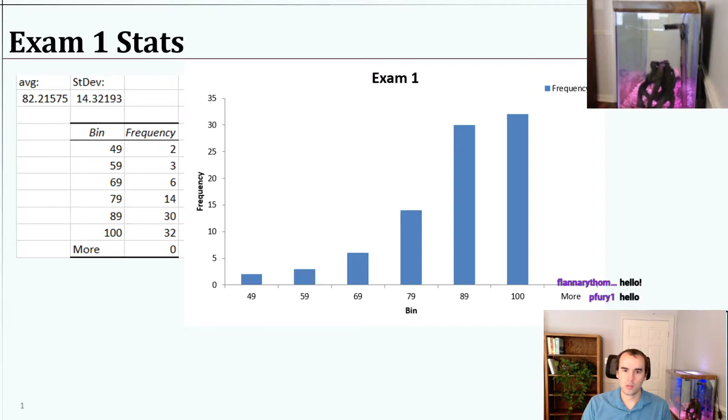So I wanted to make a note there first, and thanks for showing up to all of you who are already here. So the exam in general, a lot of people did well. You can see the distribution is kind of highly favoring the higher grades. That's a good thing. Typically I'd probably expect something a little closer to a bell curve, like that. But this is certainly acceptable as well.

I'd like for you to be mastering the topics and capable of doing well on the exam. So there's one thing I wanted to mention.

There were a few cases of people who decided that with the first problem, the BOD problem, it was going to be a good idea for some reason to use the book. And it was very apparent to me that you used the book, those of you who did, because you were using equations that we have not covered yet, and we won't cover for another few weeks. So either you studied well in advance, or you decided to use the book or some other resource online, which essentially you signed in paper that, through Moodle, that you weren't going to cheat in any way.

So maybe I should have been more clear that no, I do not want you to use the book. But for those of you who did do that, I simply had no sympathy. So if your answer involved one of those BOD specific equations, then you got no partial credit for your wrong answers there. It wasn't a big deal.

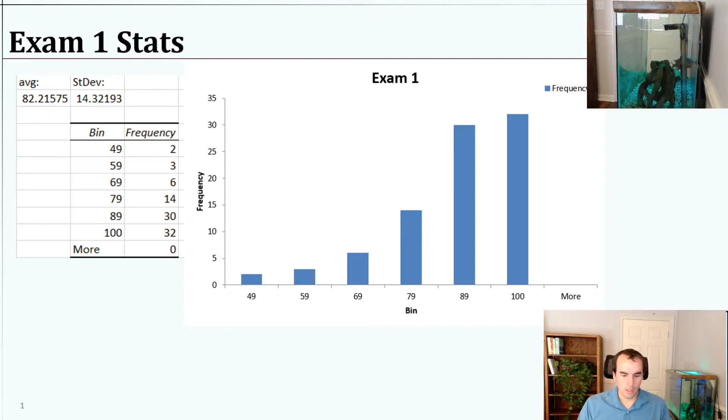There's no reason to go look into it. I actually spend a lot of time working on creating new problems so that it's fair for everybody if somebody did try to cheat. And so if you're going to do that, it's really not helpful, you know? So I'd encourage you to rethink the way you're approaching that.

So anyway, I'm not going to bother with any academic discipline sort of thing. I just don't think that was a very professional or upright thing to do. And so the grades, for that particular problem, reflect that.

Okay, anyway, overall I was pretty happy. I think a lot of you will be happy. Two of you had a perfect score. I didn't, even before I touched up any of the grading, I didn't have to touch those grades at all, so that was excellent. Congratulations to the two of you who got a perfect 100.

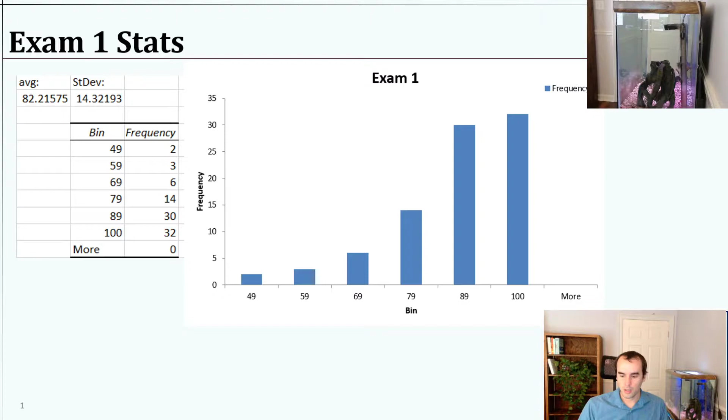All right, so with that, unless there are any questions, those should be posted now to Moodle. I did that just before we began here, so you should be able to see those any minute now if you check. And if you've got any questions in that regard, I'm happy to answer them, although I might save them for after, at the end of lecture, unless you've got something right now that's pressing on your mind.

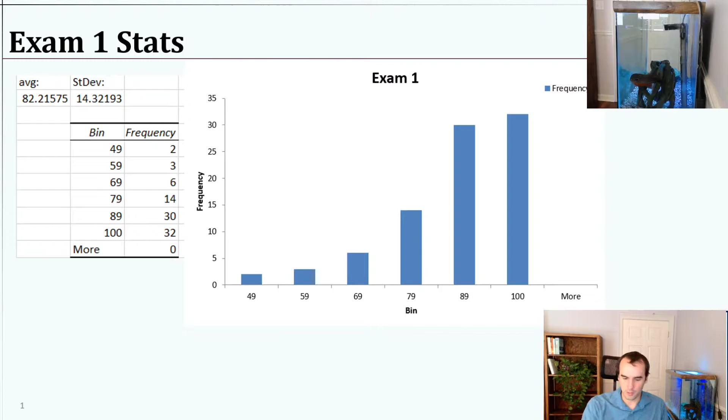Okay, so otherwise we're coming back to membrane filtration, and I was busy scurrying around trying to get ready just now. I might go and find my Lifesaver water bottle to show you the water bottle that encases a membrane filter.

We're going to have some time to solve a few problems at the end of this lecture, so I might go ahead and try to find that while you're working on a problem here in a little while. Okay, so what I want to do today is really get into the details of how to mathematically describe membranes and membrane processes. We've been talking about membranes as some sort of permeable membrane, permeable flat sheet.

We could imagine it kind of like a grid or a screen where there are pores that water can go through, but particles cannot. So you get particles or other objects stuck on the grid.

With that in mind, think about a simple membrane schematic where water is coming into this chamber, some portion escapes through the membrane, and some of it is rejected by the membrane, along with presumably whatever contamination the membrane is removing.

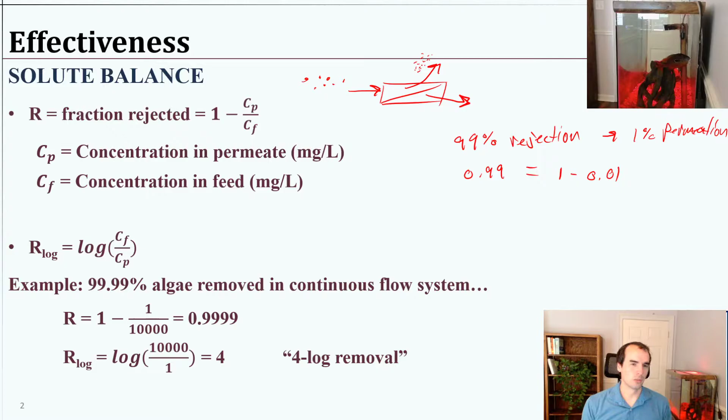That's all we're saying right here, but the reason we might describe it this way is because the concentration in the permeate and the concentration in the feed might be easier to measure or easier to know than the concentration in the retentate. So we look at the concentration in the feed and the concentration in the permeate in order to know something about the concentration in the retentate.

So the fraction rejected we can get if we know something about how dirty our water is, and we know something about how clean we need the water to get and how we've designed our operation. Then we can manipulate this, use those two parameters, and know something about this concentration.

And keep in mind, again, we do have a mass balance here. We're not creating or destroying any amount of matter here. So that's one useful tool we have.

We can also do the same type of thing but use log units and call that R log. In the case where we want to remove 99.99% of algae, think of our previous example from last time, except instead of using a batch case where we just squeezed most of it out, we can have a flow-through system where we have a feed, a continuous feed and a continuous retentate.

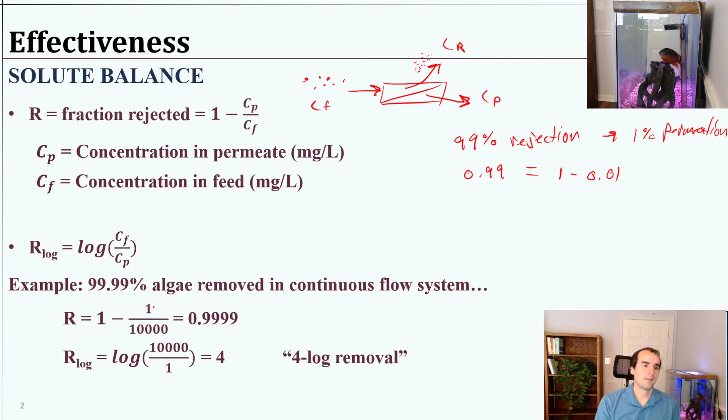And then we can say the R log in that case we're going to call that 4, using the same type of principle we described at the beginning of the semester in terms of using that log shortcut. So a 4 log removal, meaning that the fraction rejected is 0.9999, translates to 1 minus 1 over 10,000. That's 4 log units, 1, 2, 3, 4 zeros there, 4 log units in terms of base 10.

And so we can take the R log of that fraction, that would be the same thing as writing, if we take just R of 99.99% removal, if we take 1 minus that 1 over 10,000, we get 0.9999. If we take the R log, instead of arranging it this way, we can simply say the log of what's in the feed divided by what's in the permeate.

That's going to give us our R log solution here. So the log of 10,000, because our feed is 10,000 times more concentrated than our permeate, we have 10,000 more of these dots than we do on the other side. That's our 4 log removal, where our log is 4.

So it's basically the same way to describe it, and mathematically we just put it this way. It's probably intuitive, you're probably able to intuit this just based on what it means when we describe 4 log removal in general, but you'll have this equation on your equation sheet anyway.

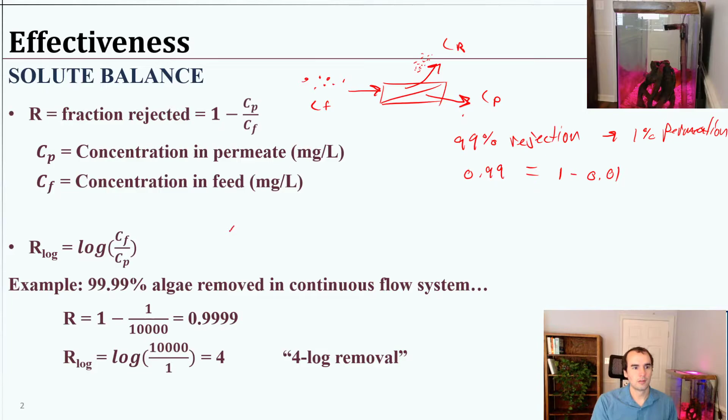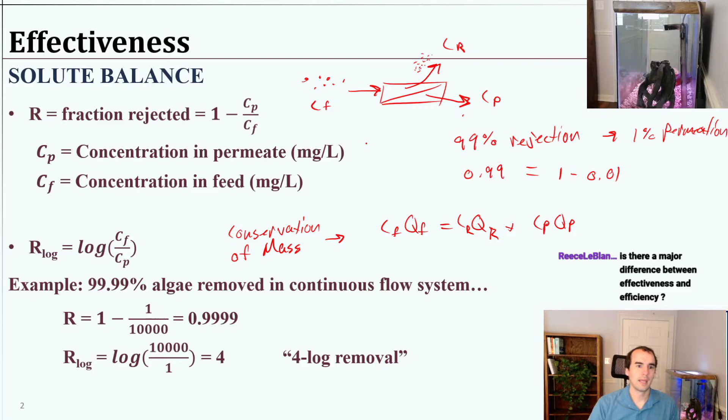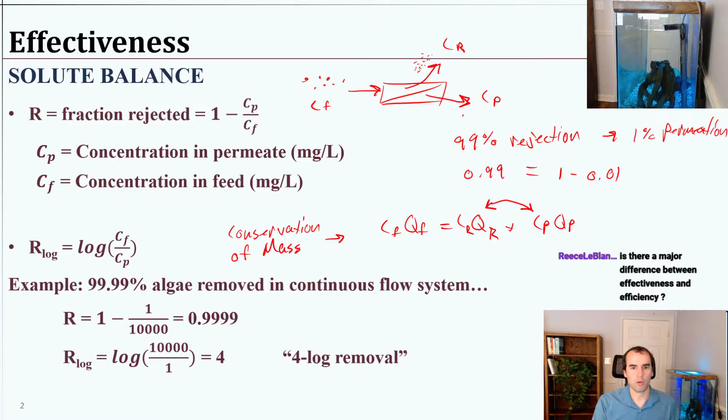Before I go on, I did mention we have this general conservation of mass. Based on the conservation of mass, we know that the concentration in the feed times the Q in the feed is going to be equal to the concentration in the retentate times the flow of the retentate, plus the concentration in the permeate times the flow of the permeate. Hopefully that's obvious, we've been doing that type of thing all semester long. This is just looking at a control volume here where that box is drawn, and even though we might be separating the mass, the membrane is effectively dictating how much is in here versus how much is in here. Essentially, it's still the same in terms of overall mass. So that's our conservation of mass.

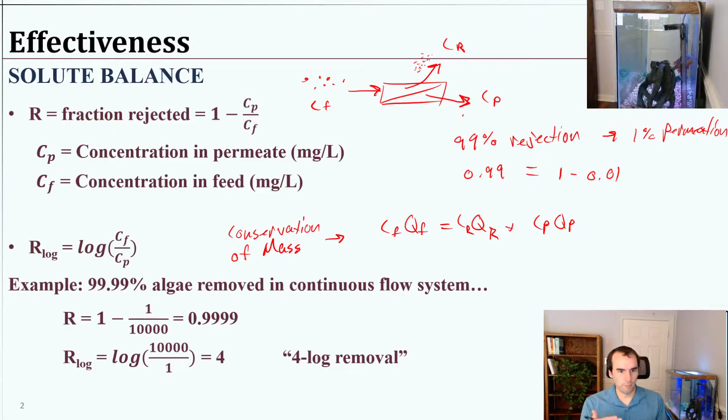Is there a major difference between effectiveness and efficiency? That depends a bit on how you define both of those terms, so it's a good question. You might be thinking of effectiveness in terms of how effective it is at removing a given particle, and that would be kind of what we're talking about here with the solute balance. It's effective at removing 99.99% of viruses or algae or whatever. So you can have a membrane that has X amount of effectiveness at removal.

But then you also are interested in considering the efficiency, which is a really good question because it leads us into the water balance, where we think about how efficient we are. We could look at it on a water balance: how much clean water compared to all the dirty water we produced, or the total flow of water we're feeding into the membrane. So there's an efficiency factor there, or you could think of it in terms of the energy we're spending. Generally there is some correlation between the two, where to get really high effectiveness at particle removal, you likely have to use a small pore size membrane, meaning you have to apply more pressure, so it'd be less energy efficient, or perhaps you have to do more back flushing, send more water to the retentate, and have lower efficiency on a water basis. So there's an important distinction I would make there.

In terms of water balance, the way we would typically describe a water recovery rate, this time I'm going to use lowercase r. I apologize for the different r's, I try to stick with what our book and the other resources available to us use. Our book doesn't do much with it, so if you're wanting to read more about this, I would point you to...

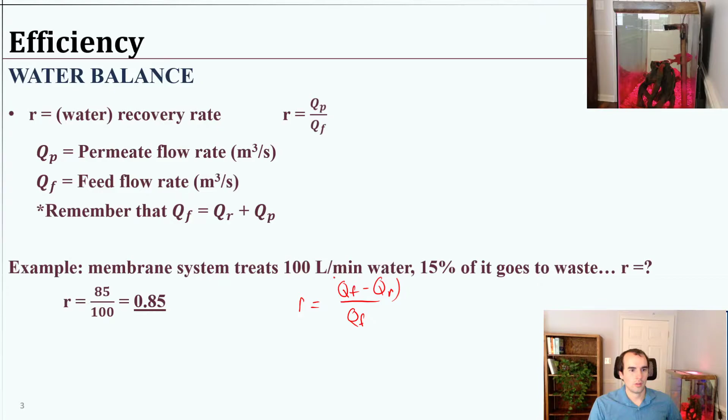In another example, we could say that if a system treats 100 liters per minute of water and 15% of it goes to waste, R equals 85%, because our recovery is equal to Q in the permeate divided by Q in the feed. We were given that 15% of it goes to waste, so really we could define this Q permeate as QF minus Q retentate.

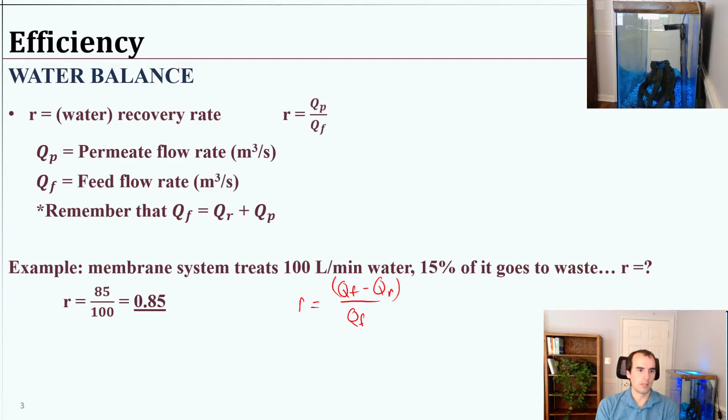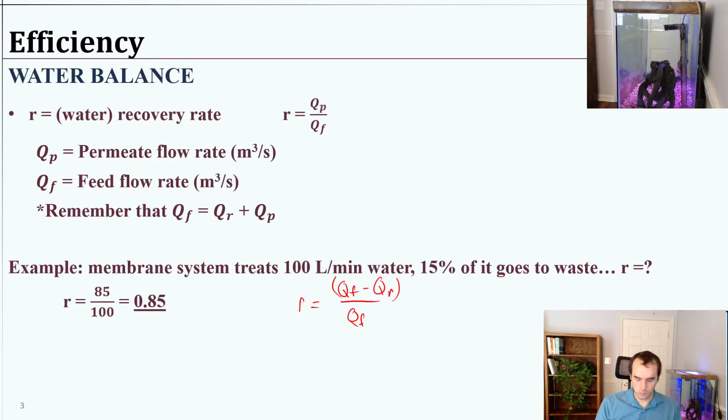Essentially what I did was manipulate our flow balance. Keep in mind, just like the conservation of mass, that also applies to our water - we're not creating or destroying any water in the system. We always have the total amount of flow in the feed equal to the total amount of flow combined in the retentate and the permeate. Hopefully this should be intuitive once you take a look at it, and this is again a relatively simple equation just to describe some basics here. These units don't have to be exactly meters and seconds, this could be liters per minute or whatever.

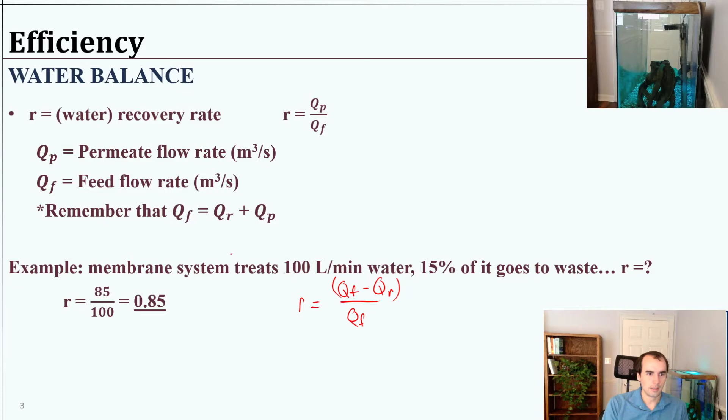Okay, so then another term we want to talk about is the production. How much water are we producing, and how do we know how many membranes we need to get there? So that would be where we describe flux. Often we use the symbol J for flux, and what we're talking about is flux across

a membrane. So just like our granular filters, we had some sort of filtration bed and water was being applied at some loading rate; for a membrane, the same thing applies. We have some flow rate of water normalized by area. So we still have Q divided by area. In this case, it's the area of a membrane. So that's written right here.

And by the way, this is going to be the flow in the permeate, because when we're talking about flux, we define it as flux across the membrane, not flux meeting the membrane. So there is an important distinction here where we might be applying a lot of flow to the membrane, but some of it is just going to the side. So really when we're talking about flux, we need to be talking about flux moving across it.

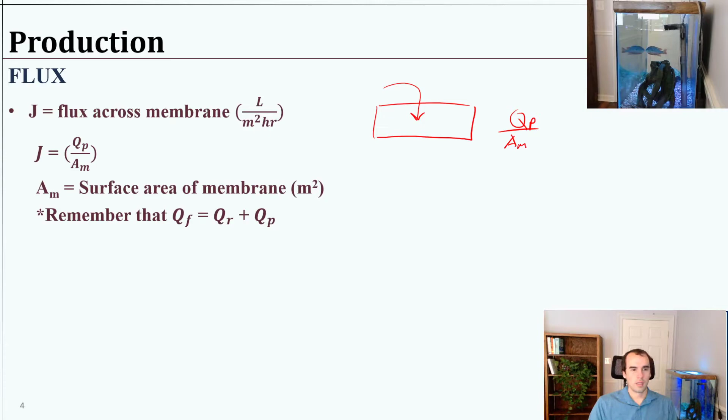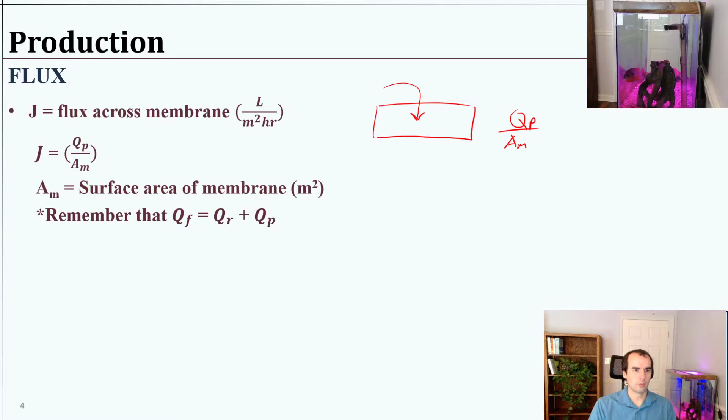Of course, area here will be the surface area. And if you remember our discussions, we could have a spiral wound membrane with multiple flat sheets in here, or a tubular membrane. So there's some geometry we can expect to deal with in terms of solving for membrane area.

But again, looking at it this way, it's relatively simple. And we'll take a look at a few more equations looking at how we might understand how much flux we get given some pressure that we applied.

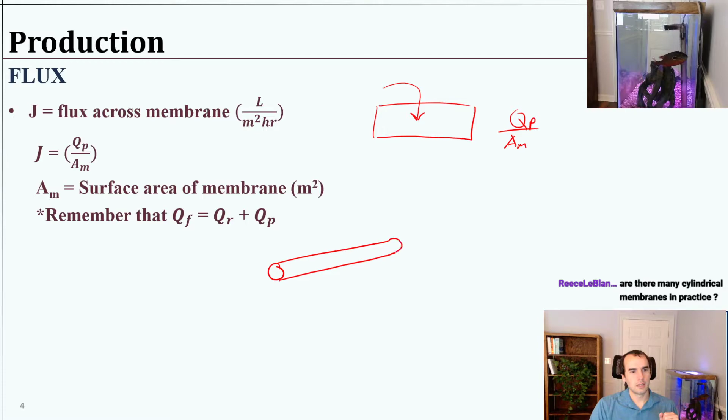Okay, yes, actually, there are many cylindrical membranes in practice. I did show a few. So by cylindrical, are you meaning like hollow tube, like this? These do exist. I think the flat sheet cylindrical ones are probably more common, or we have them like this, more common than just tubular.

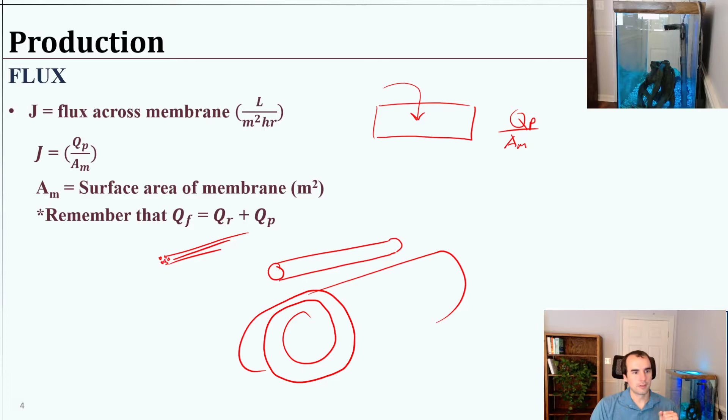But then nowadays there's lots and lots that are those hollow fiber ones like this, all bundled up in some container. So certainly they are applied in each way.

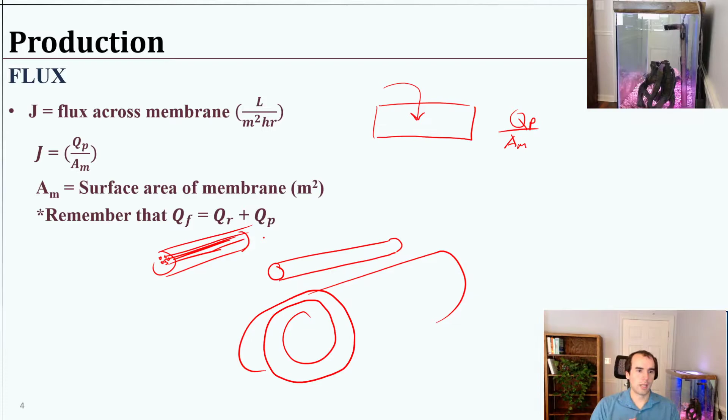My impression is that a simple tubular one is not particularly high surface area, so those would probably be used more often for microfiltration rather than ultra or nanofiltration, and perhaps for smaller cases or laboratory scale studies, things like that.

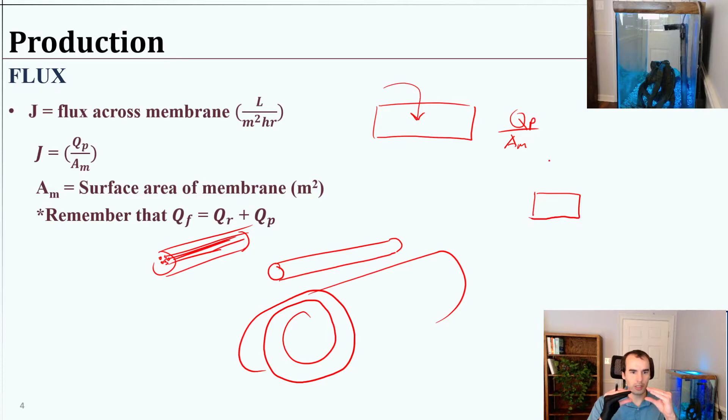In reality, a lot of laboratory scale studies are legitimately a flat sheet, just sandwiched in some sort of a chamber for easy control, easy access, all that. Okay, so here's an example.

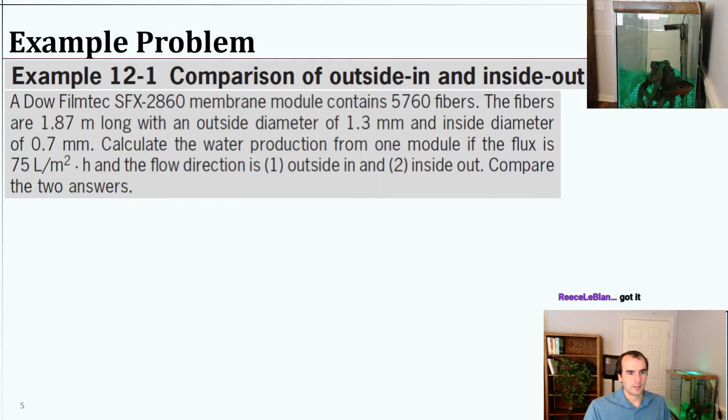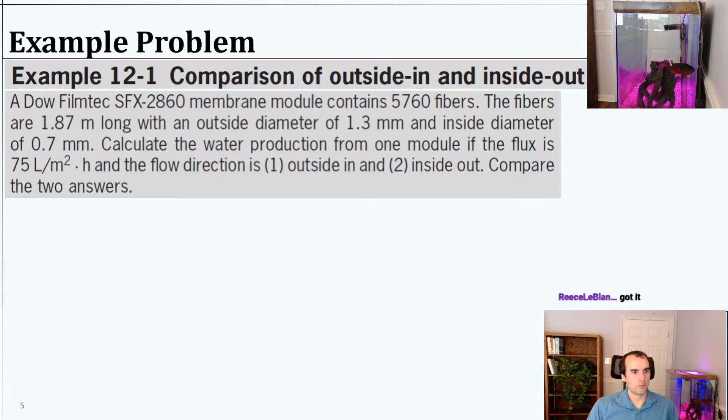Okay, so here's a problem. This is from chapter 12 of one of the textbooks, not ours. Ours doesn't give membranes quite enough time. So we're going to compare an outside in and an inside out flow regime. We have a Dow Filmtec SFX-2860 membrane module, and this membrane module contains 5,760 fibers.

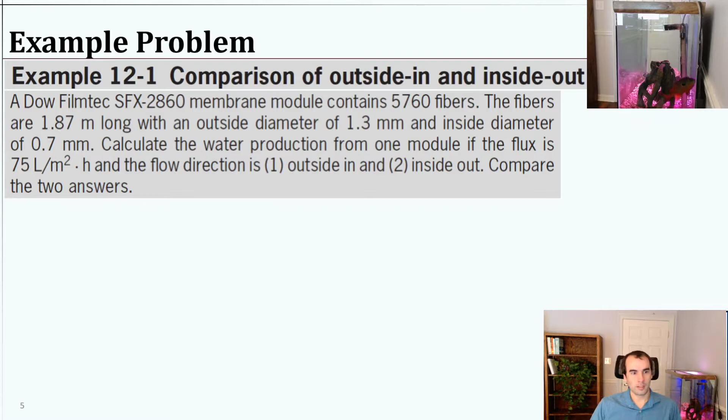Each of those fibers are 1.87 meters long with an outside diameter of 1.3 millimeters and an inside diameter of 0.7 millimeters. And so we're asked to calculate the water production from one module if the flux is 75 liters per square meter.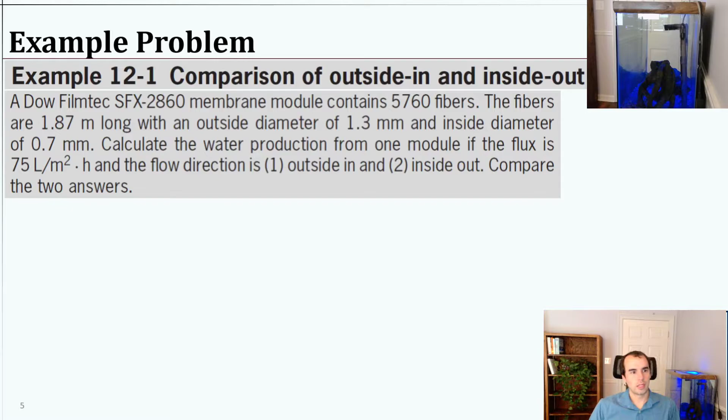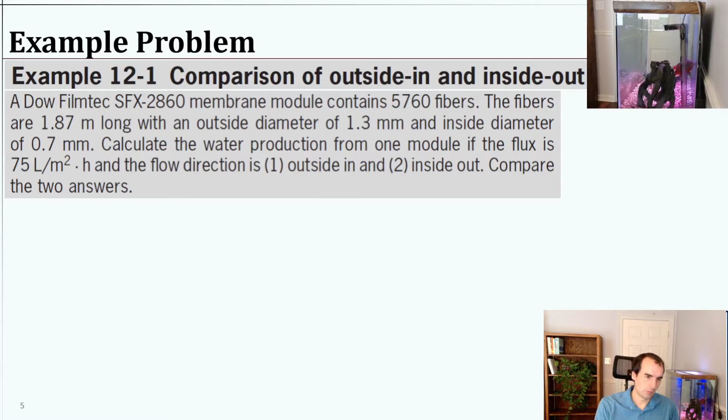And we're instructed to do this in the cases that the flow direction is outside in and inside out. Well, it's 1 and 2 here. And then it asks you to compare the two answers. So let me remind you what this is talking about.

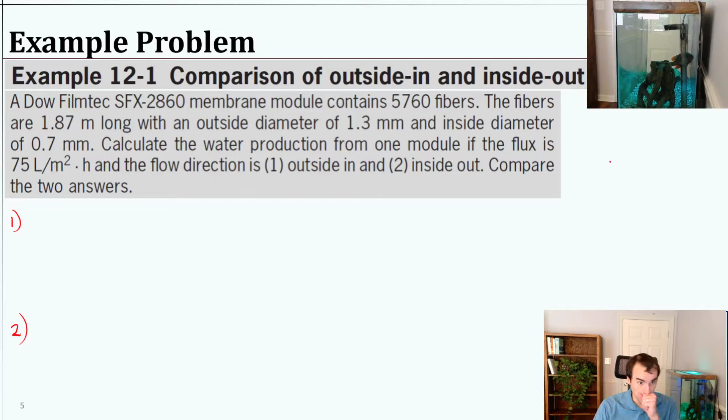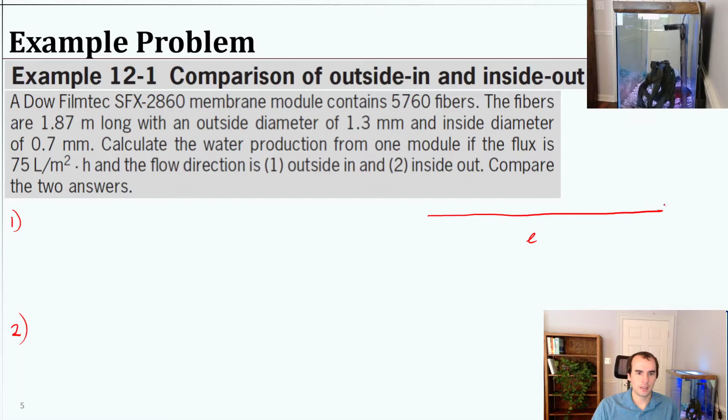So these are long fibers that have some length. And if you were to take a close-up look at just one fiber here and look at the edge, what you're going to end up seeing is a fiber that has essentially two diameters, right? So we have something like that, where the membrane material, the supporting layer, is all in there,

and whether we're operating inside out or outside in will dictate which surface of this cylinder is used as effectively the separation layer. So either we're mapping the geometry to find the surface area here in case 1, right?

Or we're going to do it along the inside for case 2. I'm just cutting it in half just to kind of delineate the two different versions, but it would go all the way around in either case. I just drew it in half just to demonstrate the difference there. Okay, so I'm going to give you a couple minutes to look at that.

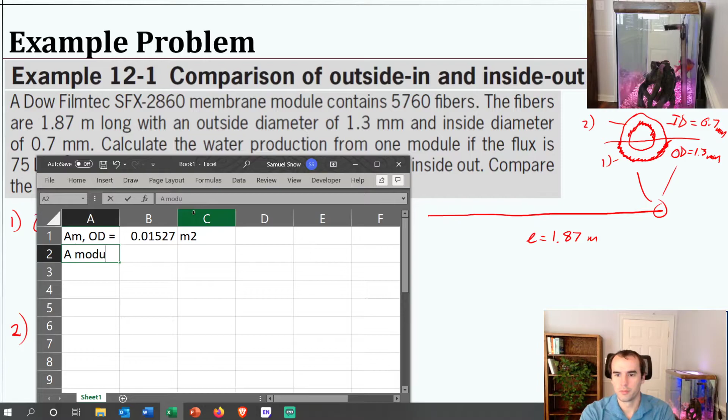Let's say area of the membrane OD. Okay, so that should be the area in square meters. Then we need to know the area for a module. And so we're going to take this number and multiply that by the number of fibers per module, which was 5,760. Also in square meters. Okay, so we've got that.

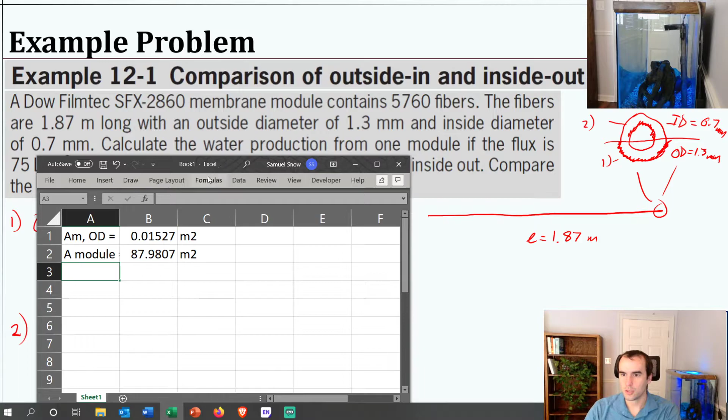Next, what we're going to want to do is take a look at, so this was, let's say, 0.0152, 152. So the area of a module is 87, but really effectively 88 meters squared.

Okay, so somebody got a different area for the membrane. For one fiber, did you do 2 pi r as your circumference? That's correct, right? I'm not having a brain fart. What did you do differently? I'm going to go ahead and continue working on the problem, but let me know if you see something that's different.

So then we want our flow rate. Our flux is flow rate over the area. So our flow rate then is going to be the flux times our area. And that's why we're solving for the area of the module. Okay, so you got 0.0076. So that was for one fiber, I'm assuming.

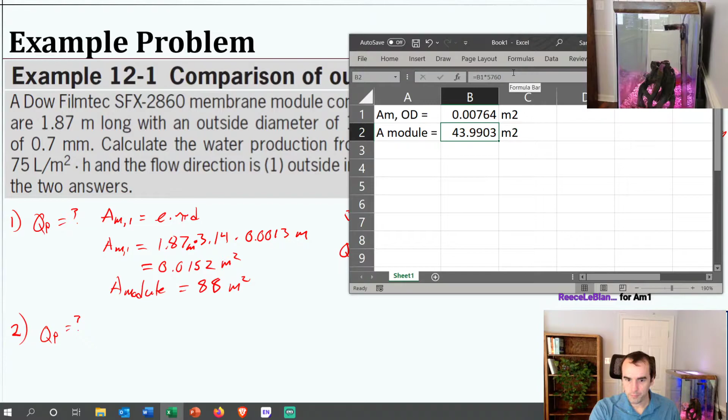So then we should update this here. So it should be half that, 44. Yeah, you could certainly find the QP for one fiber and then multiply. That multiplication doesn't have to happen on the front end. That could be either place. So this one was half that. Okay, yeah, so that's certainly fine either way.

But once we get this going, then we have 75 liters per square meter times essentially 44 square meters. And this is per hour. What we double check is that the units are going to cancel properly. It looks like we do not have to convert our liters. We can give an answer in liters and that will be acceptable because these square meters will cancel here. Although, as you know, we could do that conversion if we needed to.

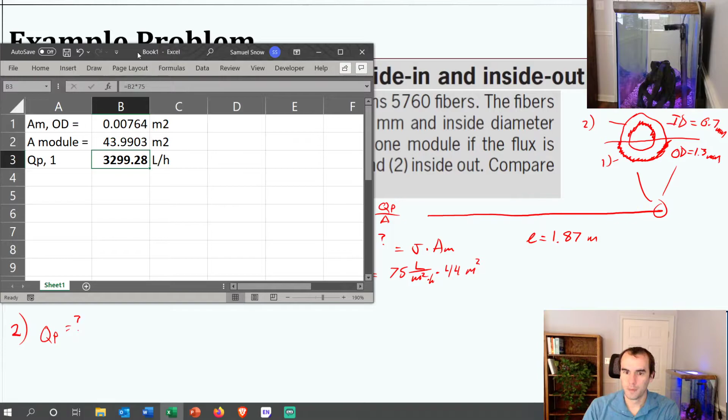Okay, so then from here, we'll say QP equals this guy times 75. That'll be liters per hour. And that's our answer. Okay. And we'll just go ahead and round up to that for liters per hour. Okay, so then we'll repeat the same process.

But here we're using the diameter of 0.0007, or that 0.7 millimeters. So what we can do is we'll just take it and put it down here. This time we're going to do the inner diameter, label it that way, and we're just going to change our diameter.

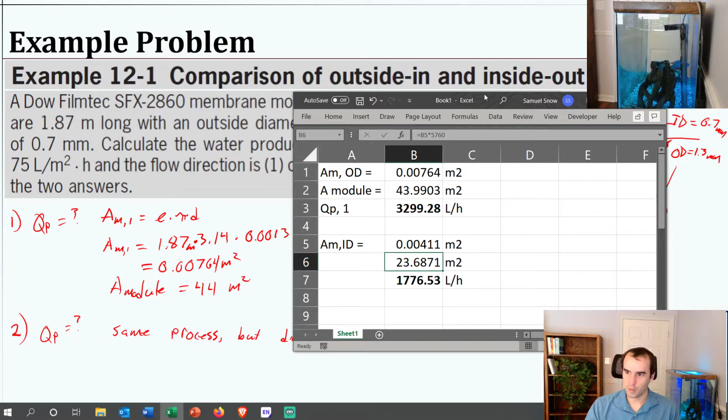Okay, so then from there, the same process should be applying, and all of our calculations then should be in place, and the area of one membrane module with 5,760 of those fibers should yield 1,776 liters per hour. So quite a bit different. If we take a look at these two, and it did ask us to compare them. So when we solve this, we get QP equals 1,776.5 liters per hour.

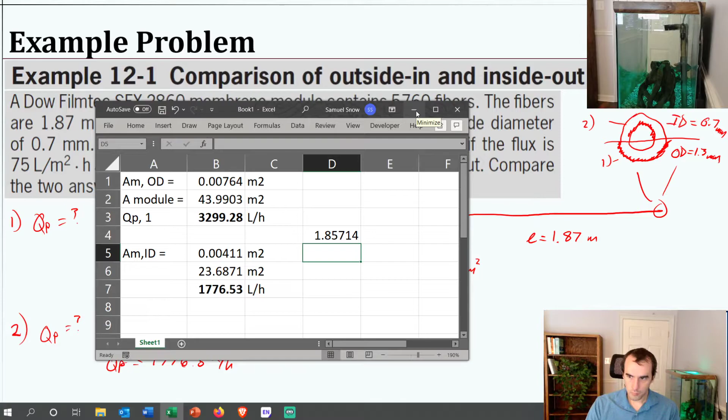So comparing those two, there's a variety of ways you can do that. Just simply looking at them, compare how much more does one give compared to the other. So let's just say one divided by the other. So the outer diameter gives us almost 2 times as much flow, is what this calculation shows us. We could also look at the inverse and say, okay, well, that one's almost half of the flow of the other. So just for one module here, that difference of what, 0.6 millimeters, is making a rather large impact. So when designing these membranes, that's definitely something to keep in mind.

Okay, so hopefully that was helpful. That's just a simple geometry problem to take a look at how we might analyze a system based on the premise of how much surface area it has and is usable. So on the pressure side of things, we want to consider that driving force, that pressure, and how that relates to how much flux we get.

So our driving force is essentially that transmembrane pressure, that pressure that's being applied. So if we have some membrane, then we can describe the delta P as how much pressure is in that feed being applied to it versus how much pressure is in the permeate.

Now, in some systems, we might have multiple membranes one after another. That is certainly possible, especially if we have a membrane system with progressively finer pore sizes. We would want to protect the very delicate, tiny pore size membranes by putting first like a microfiltration, then an ultrafiltration to remove all the particles that might damage the tiny pores of that membrane.

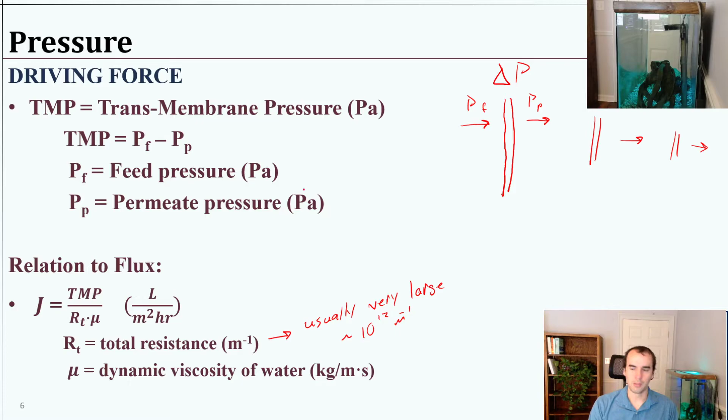It'll depend on the type of membrane, of course, but something like 10 to the 12th per meter. And that kind of makes sense when you think about it. We're normally using very small, very thin membranes, so using meters just makes it compatible with our pressure units and all of that, but we don't have a full meter of membrane, so this unit is describing per 1 meter of it. That's going to be a large number.

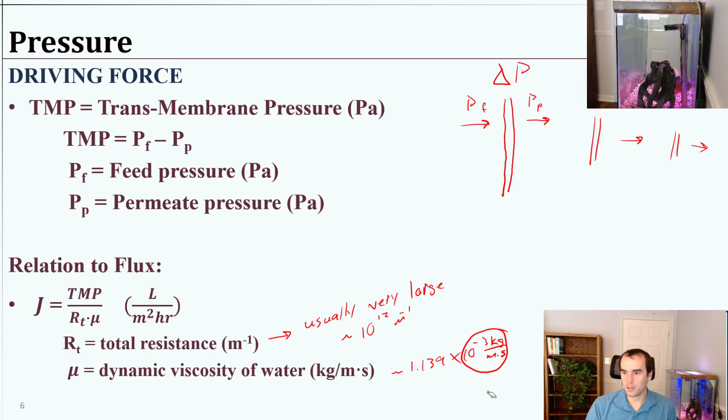Okay, you're familiar with the dynamic viscosity of water. The only thing I'll say here is, when you're using the lookup table that I provide on the exams and that our book has, remember that this is something like 1.139 or whatever, but it also has that times 10 to the minus 3 in the units. So make sure you're writing out the units and you're not missing that times 10 to the minus 3. There were certainly some examples on the exam where some of you forgot to do that.

Okay, so just a few pictures here to visualize where this resistance is coming from. If you imagine pushing some liquid through these membranes, you can see that in some areas it looks like water can freely flow through these more open channels. This is a good view of what you'd expect to be a supporting layer. And then either this surface or maybe this surface is the separation layer. You have small pores in the separation layer that are leading to these bigger channels,

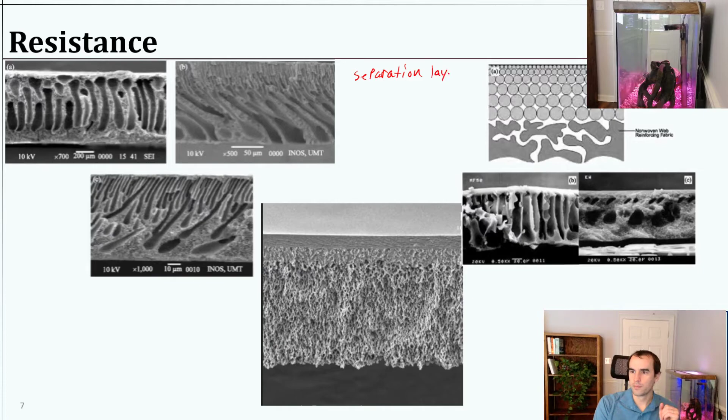is the idea. So what you want is a very thin separation layer, so that all of your resistance is being applied by that thin layer. You don't want more resistance than you have to have. So there's an important distinction here of the separation layer versus the support layer.

And here's another good example where you can see this delineation where it gets really fine versus the much larger pores. The much larger pores are going to have a lot less resistance, to the point where it's not even really a factor to the total resistance. That total resistance is going to be captured by what's happening here. And another good example right here where you can see this support layer and it transitions into a separation layer here.

Okay, so this is all innate membrane resistance that we're talking about. You could also have fouling layers. So if this was our membrane here, then we start getting particles and junk situated on top of the membrane as we're doing our filtration. You can imagine those as these little spheres here. If you get enough of that, then you're eventually pushing water through this fouling cake that itself is acting like a filter.

So when you accumulate enough junk, you have an increased resistance because you're effectively adding more membrane. It's more depth as well as potentially finer pores for water to travel through that network of particles, right? So it's not only traveling through the membrane itself, but also this cake layer. So when we talk about membrane resistance, we end up talking about the fouling layer and membrane fouling in general, as well as the membrane resistance itself. When I say fouling, I'm talking like a foulant. The membrane is fouled. I think that's what you're referring to.

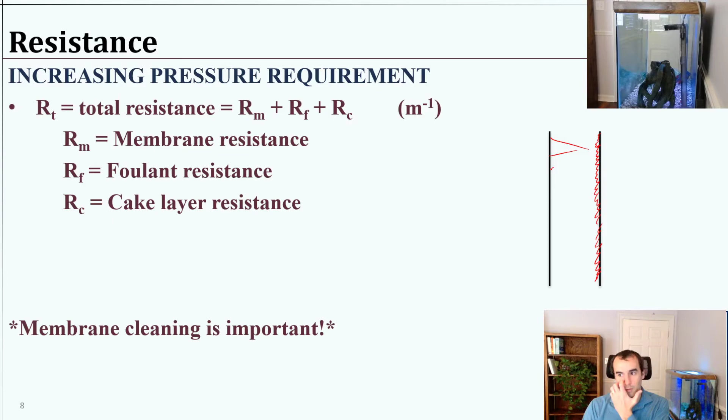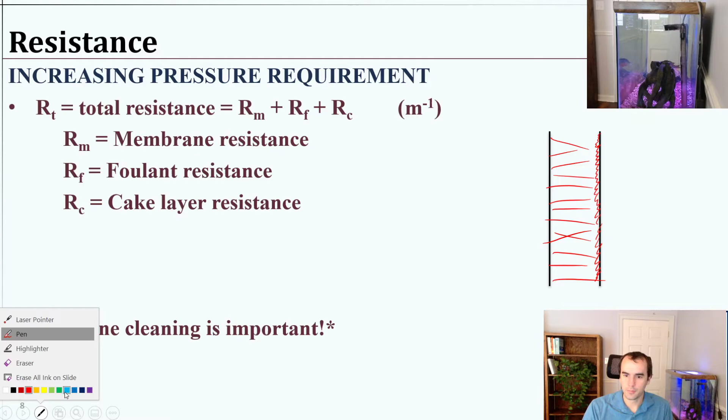So we can describe the pressure requirement in terms of how much stuff is getting onto the surface of the membrane. So if we have a membrane here with a separation layer and a network of pores for the supporting layer, what we can consider is what happens when we foul the membrane. We use some green particles, green junk, getting on here.

So we can consider 3 different types of resistance.

And by the way, Reese, let me know if I didn't answer your question or if it's not here.

So we can consider 3 subcomponents of total resistance of a membrane, and that would be the membrane itself, meaning the pore size of the membrane, that would be Rm. That's just innate to what the membrane is. Then we can have what we call a foulant resistance, and I'm going to show that one in blue here. The foulant is generally particles and foulants that occur within the membrane and all around it.

There's a better schematic here in a moment. But this is going to be particles that just get stuck along the way, at the surface, inside, just fouling it generally. So what I'll say is RF here. Now, if we let the membrane operate for long enough, we do end up getting a cake layer formed, and we end up with this cake filtration. So this would be our RC here in that color.

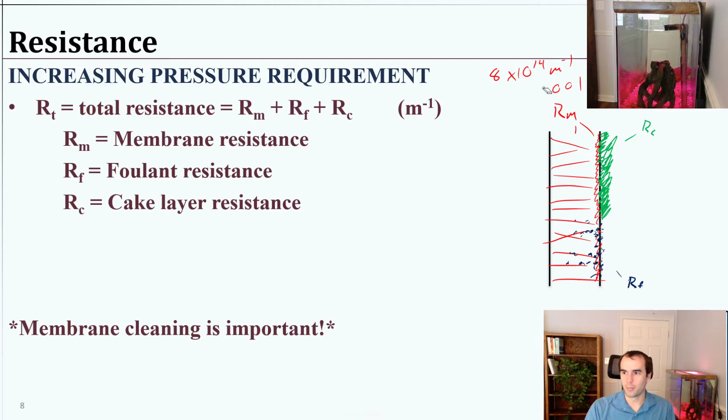But if you were to separate it out and say, okay, what is the resistance of the supporting layer? That's probably going to be like 0.001, right? It's going to be so insignificant, or we want it to be, that hopefully it doesn't matter in terms of our total operation. So if we had 8 times 10 to the 14th as our total, it's going to be some summation of the resistance provided by the membrane itself, plus any cake layer filtration, plus whatever resistance is added by that foulant, just the generic fouling.

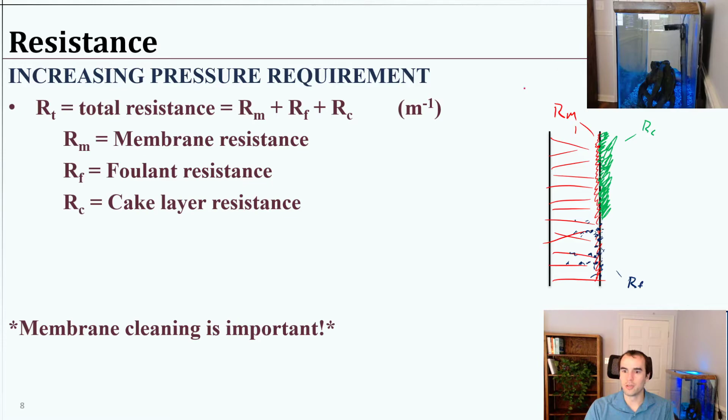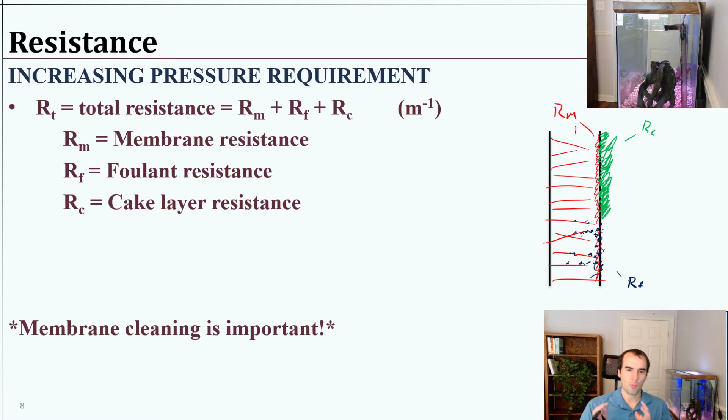So all of this to say that membrane cleaning is really important, because when we're operating a clean membrane, we know the specs, we know exactly how it's going to operate, and I think we saw last time the amount of water we get out of a membrane drops pretty quickly for a membrane that's becoming dirty compared to a nice clean membrane.

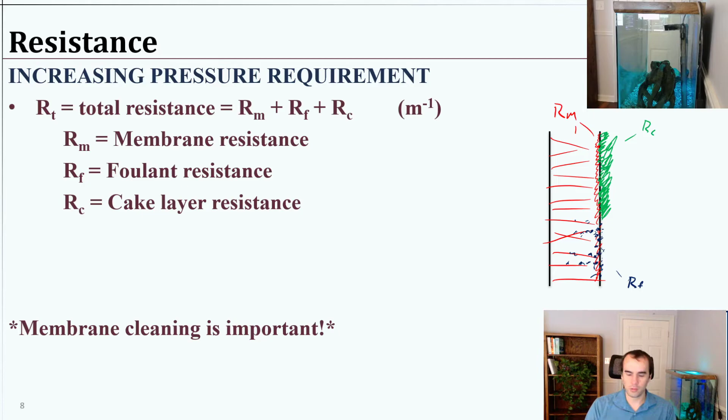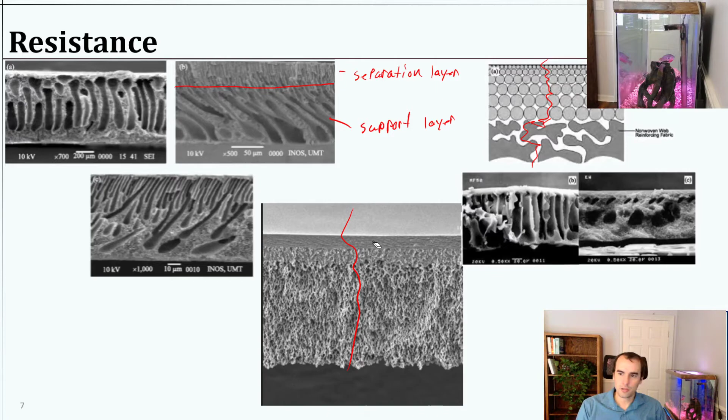And so this is essentially, if we take a look at these pictures, a measure of how permeable the membrane is. It's a measure of how much water goes through given some pressure. This is similar to Darcy's law, the permeability of a soil, something like that.

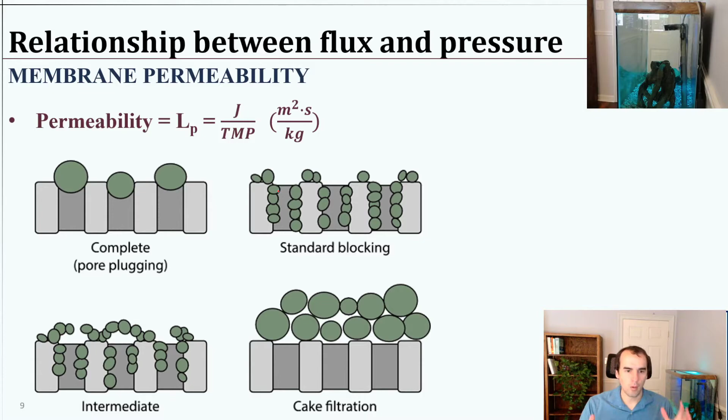It gives us another metric, or a way to estimate, if we know something about the geometry of the pores we have in mind, we might be able to predict the permeability based on that geometry, and then predict the flux, predict the pressure required, or know something about how much fouling will restrict that flow.

Okay, so another example problem here, and I think this will be the last one for today. Yeah, we have a few slides to do parts of it.

Okay, so operators of a small groundwater cleanup decide to implement a cross-flow microfiltration membrane unit as a pre-treatment step to ensure that influent groundwater into the treatment setup does not contain large particles that may clog the other stuff. The system must treat 200 liters per hour. It utilizes a membrane with a pore size of 2 micrometers, and it must recover at least 95% of the water. The influent water contains 30 milligrams per liter of particles, and the membrane rejects 85% of particles. Okay, so a lot of information given there.

Part A says, label the feed, permeate, and retentate streams on the diagram below.

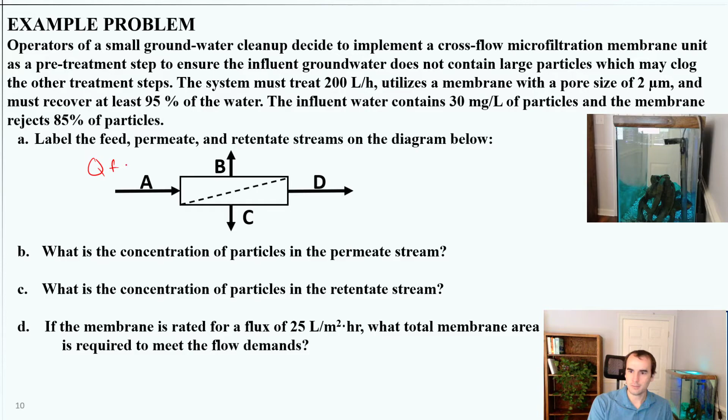To remind you that anything that crosses this boundary is what we consider the permeate. So anything being collected on this side of the membrane, that's going to be our permeate. You can describe it with either B or C here. And then of course, this is our Q retentate.

Okay, so that's all that part was. So then part B says, what is the concentration of the particles in the permeate stream?

Go ahead and take a moment, consider how you would go about that, and we'll set up to solve this.

I'm just going to go ahead and write some of these variables into Excel so that we'll have those all set and ready.

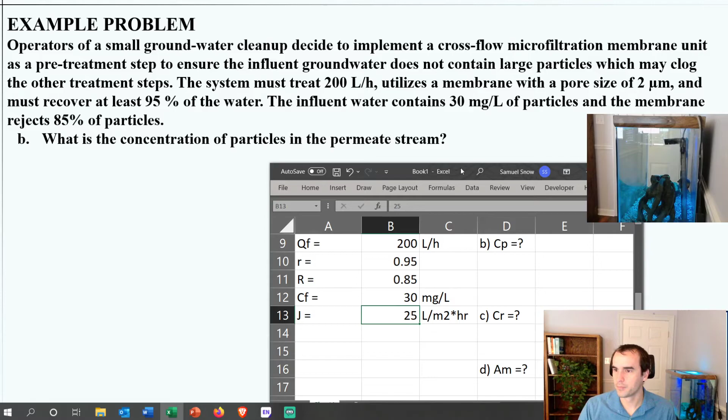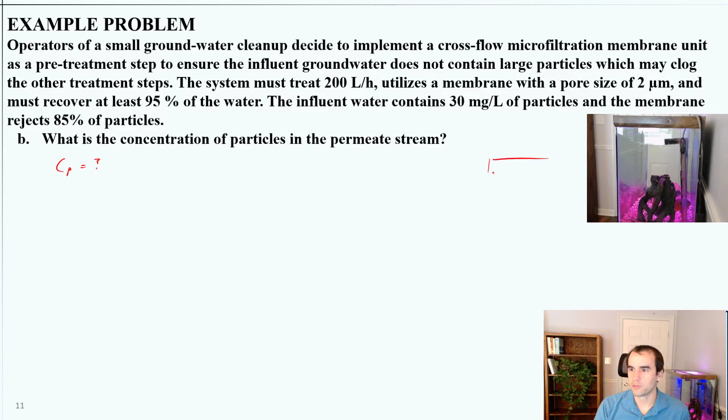Okay, we'll come back to this in a moment. So part B is asking, what is the concentration of particles in the permeate? Again, you can just draw a simple system here to visualize something like that.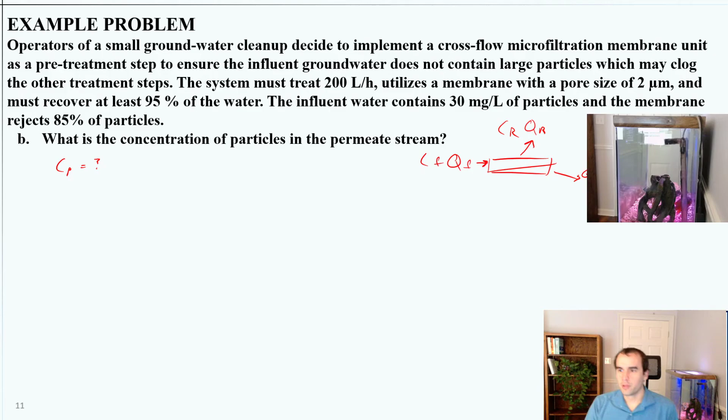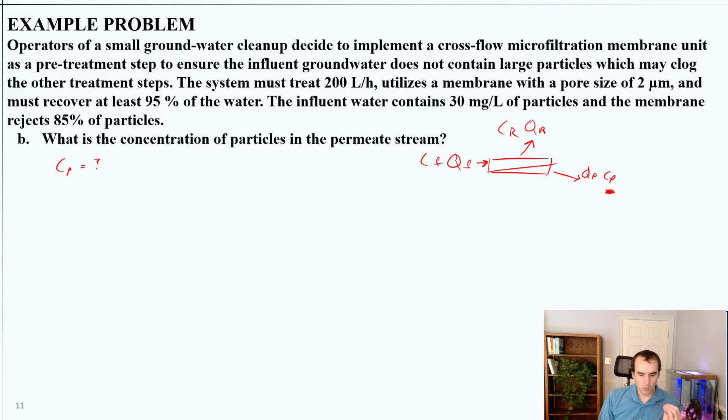So what's the concentration of particles in the permeate stream? We're looking for that CP. We need to know that. Now, before I really get into... I think the fish cam's just going to have to go away for right now. Before I get into setting up the exact equation to find my solution.

What I'd like to do is go ahead and take a look at the flow rates. Flow rates, usually they're pretty easy to find and identify given the problem parameters.

So we know we're taking the Q feed to be 200 liters per hour. And then, given that we have to recover some amount of the water, QP, the amount of flow in the permeate, should be at minimum 0.95 times QF. So that tells us Q permeate should be 190 liters per hour, which is 95% of the flow. That means our QR will simply be 200 minus 190, giving us 10 liters per hour.

Okay, so that's one of the first things I would do, just to put that out there, in line with drawing my situation and identifying stuff. Maybe I ought to go ahead and put that into Excel as well.

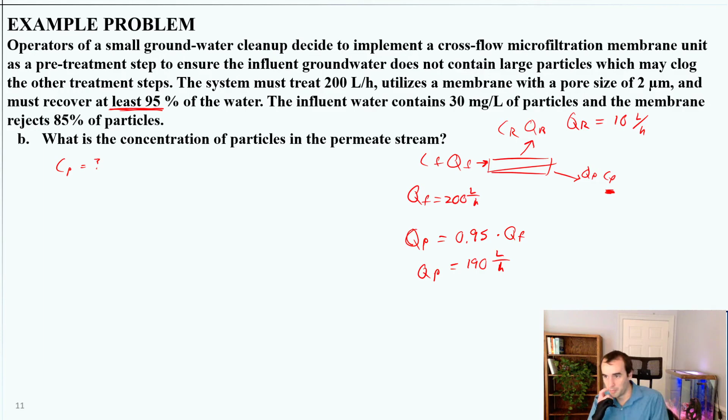Okay, so then to find our concentration in the permeate - well, turns out I don't think we really had to do what I just did first, but I went ahead and got that out of the way. The reason I say that is because we know what's in the feed, right? The CF is 30 milligrams per liter of particles.

And we are also given this rejection rate, so we're rejecting 85% of particles. So if we remember the R, that's going to be equal to the amount of particles remaining. So the particles rejected would be 1 minus particles remaining divided by what we started with. We could also say this is CR divided by CF, right? Should be the same thing.

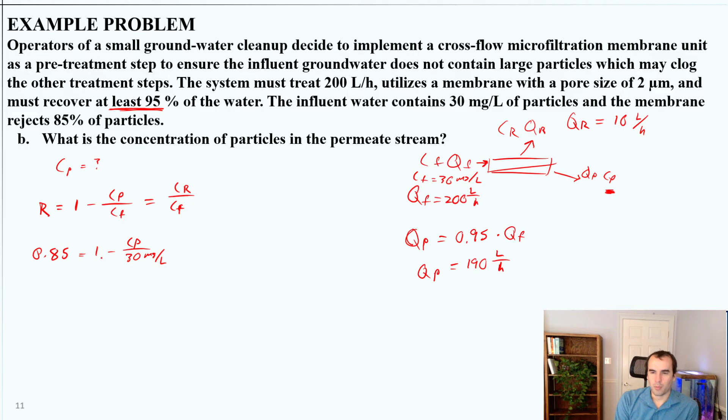So we can solve this for CP rather easily. We can say 0.85 equals 1 minus CP that we're looking for divided by that 30 milligrams per liter. So what we want to do, we'll go ahead and add this guy to both sides: CP over 30 equal to 1 minus 0.85, leaves us with 0.15. Then we can have CP equals 30 times 0.15, and that will be our answer.

I'll go ahead and put 1 minus the R here. And we should consider for a moment that if it's rejecting 85%, that means we should have 15% left over, and that math should work out nicely - we could have done this in our head basically, that 15% of 30 is 4.5. Okay, so that would be our answer for the concentration in the permeate here.

Okay, so not too confusing there. Yep, that sounds good, so we'll talk about that in a couple minutes then. Okay, so this is the way we can use that R to get that answer.

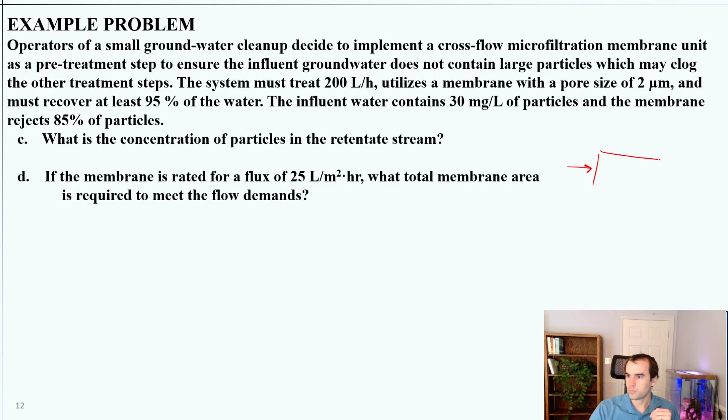QR and CR. Q feed, C feed, and Q permeate, C permeate.

Okay, so here, what we're looking for in part C is concentration in the retentate, and I mentioned just a moment ago that we could also make this relationship where we have CR divided by CF equal to R. So it should be equal to R times CF.

No, wait, I did that. That's not correct. I don't think that's correct. Hang on.

Let's just do this the proper and easy way and say CR times QR is going to be equal to what's coming in the feed, Q feed times C feed, minus the QP times CP.

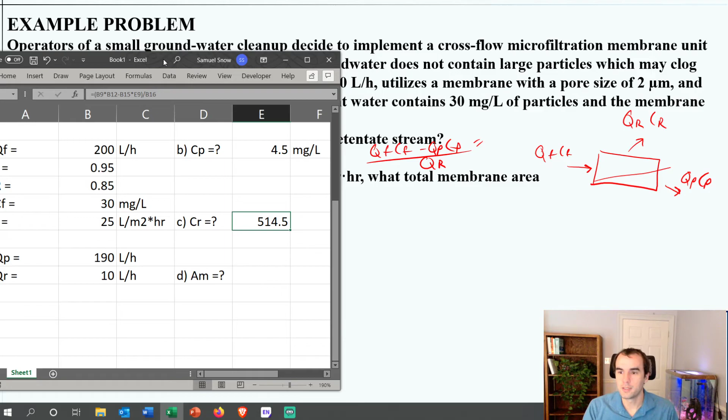So the concentration in the retentate, and I'll explain in just a second why I was wrong, but this is correct here. I think it'll make sense for you. Yeah, you probably already see it.

Okay, so back to the PowerPoint. You know, with these stylus pens, you actually do need to use the right way.

So the less water is why this becomes such a big number. So, 514.5 milligrams per liter.

Now, one thing to note here, whenever we are using a filter to reject stuff, and some of the water is going through, we should, if we're rejecting anything more than 0%, have a concentrating effect, so we should be able to double check our answer that whatever our answer is in the retentate should be larger than what we started with.

Which is why it was not making sense to just multiply by that ratio. I think maybe if we divide by 1 minus R, then it works out. But yeah, this is the safe and easy way to do it without worrying about that.

Okay, so part D, if the membrane is rated for a flux of 25 liters per square meter per hour, what total membrane area is required to meet the flow demands? As I said at the beginning, there's kind of two ways to interpret this.

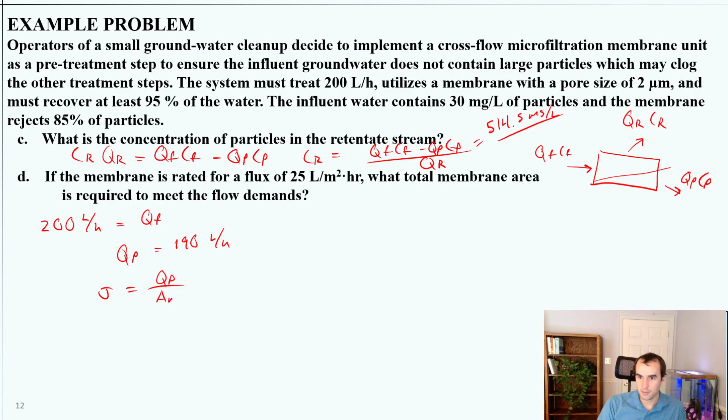So we can say our flux is going to be equal to our flow rate divided by the area of the membrane. So that means our area of the membrane is going to be the flow divided by our flux, and that should give us our area.

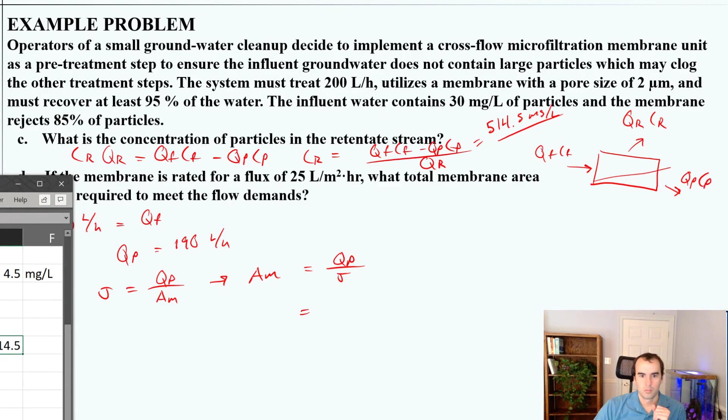So when we do that, it should be equal to that flux we were given divided by, or excuse me, the flow of the permeate divided by the flux that we're given.

And let's double check here. We have liters and liters, square meters, and hours and hours, okay, so that should be okay. So that gives us 7.6, and we're left with square meters.

Because that was going to be, let's go ahead and write this out, 190 liters per hour divided by 25 liters per hour per square meter. Yeah, so all those units should cancel out nicely, and we'll get meters squared on top. Oh, well, I went ahead and did that.

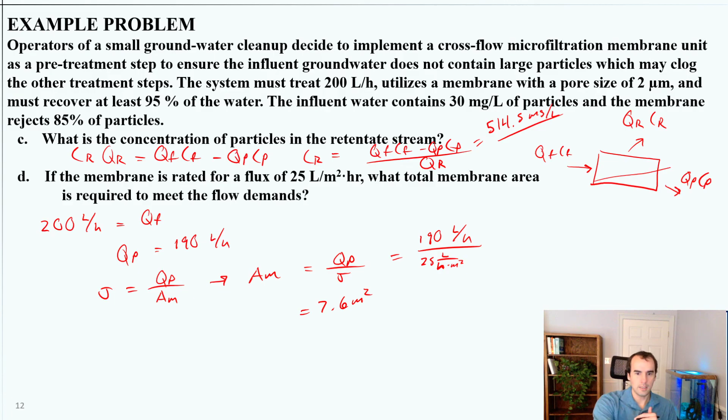Okay. All right, so I know, Reese, you had a different way of doing, I think, part A. Happy to talk about that. I think that's a common issue, if I'm remembering these numbers correctly, from past years of doing this problem as a homework or exam problem. So I'm going to come back to part A, unless there are any other questions, and we can talk about how that did. I meant part B. Yeah, part B here. So any questions or issues?